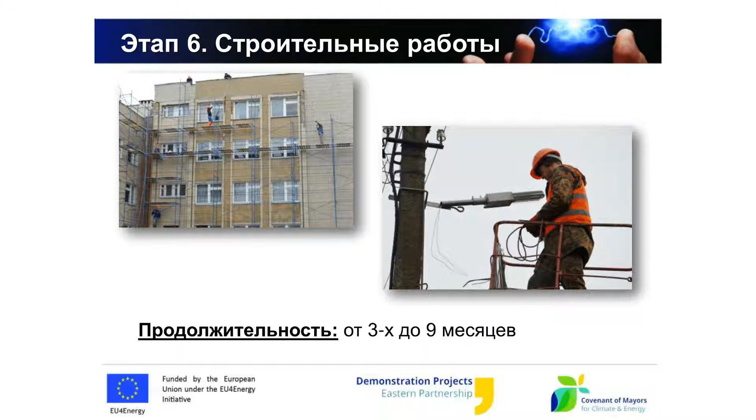Then we talk about acceptance of works, exploitation and maintenance, and verification of the project. So construction works, depending on the type of the project, can take from 3 to 9 months.

We talk about the different duration of construction, and definitely if you start your project somewhere in November, in winter, construction works are hardly possible. Therefore, your final stages will be prolonged for 3 months. So it's better to have everything done in due time and test your facility, your building in winter when energy efficiency indicators will be most visible.

What is construction or construction works? We talk about capital or current repairs of the building, restoration and renovation, and we talk about all the activities which are about construction works. Technical supervision is an inseparable part of the construction works, and from our point of view, technical supervision is a number of different measures like control over quality, volumes, cost, and documents of the object.

And the aim of the events is to make all the works from the beginning of the project till the end of the project manageable, transparent, predicted, and understandable for the client. And when we talk about technical supervision, we talk about a company or a person or a number of persons who will be the ears and eyes of the client directly at the construction field, and who will be able to demand quality results which will be satisfactory for you and for the European Union as the donor of the project.

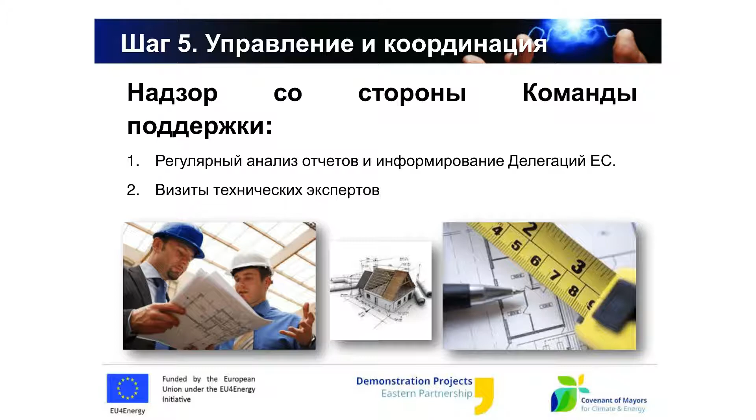Besides that, I've already shared the information about additional monitoring missions we perform. Our experts will have regular visits to your sites, and they will prepare reports about the quality of works and give recommendations to you, to project managers and project teams. And I hope that you, as project managers, will tell the construction companies about those deficiencies, and then within reasonable periods these construction companies will correct everything according to the recommendations.

If everything is done well, sooner or later, within 3 or within 9 months, you will come to the process of final acceptance, the handover, which is the process of confirmation of everything that has been done and that corresponds to design solutions and current legislation. And during the final acceptance, you study the site which was involved in the project. On the basis of this evaluation, you record in the protocol the deficiencies which have been traced and things which have been underdone by the construction companies. Also in the protocol, you record the period which you allocate for those deficiencies, and then on a repeated basis you accept this site as a ready one and you put it into operation, into commission.

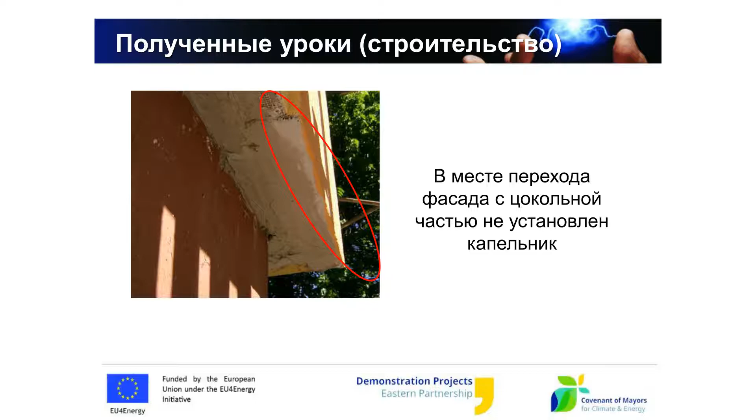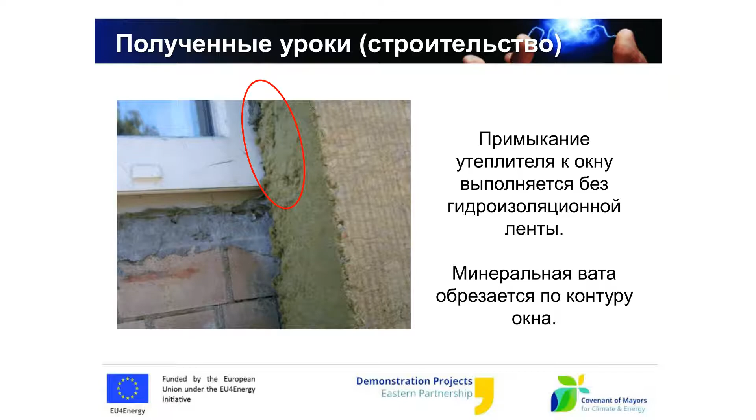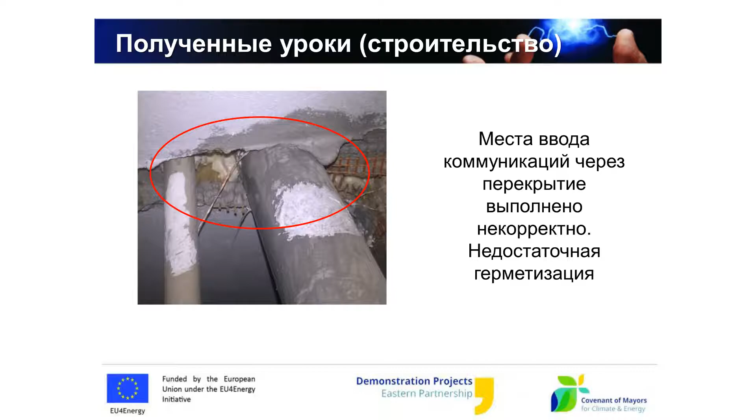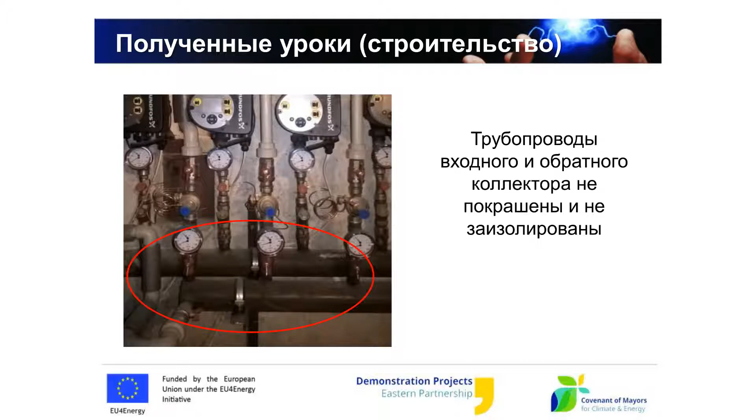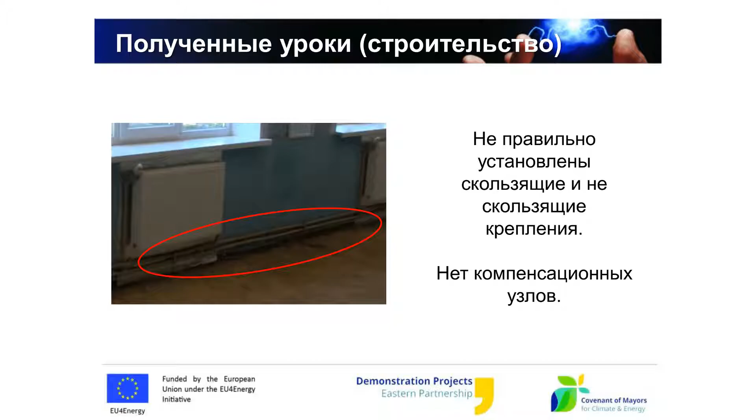In the projects which presuppose reconstruction of internal heat supply systems, all the pipes should be either pre-insulated or insulated with preliminary insulation. Here there is an example of bad reconstruction of internal heating system. Here we see that the binding was done in the wrong way, there are no compensation units, and even the pipe may crack, and all these works will be good for nothing later.

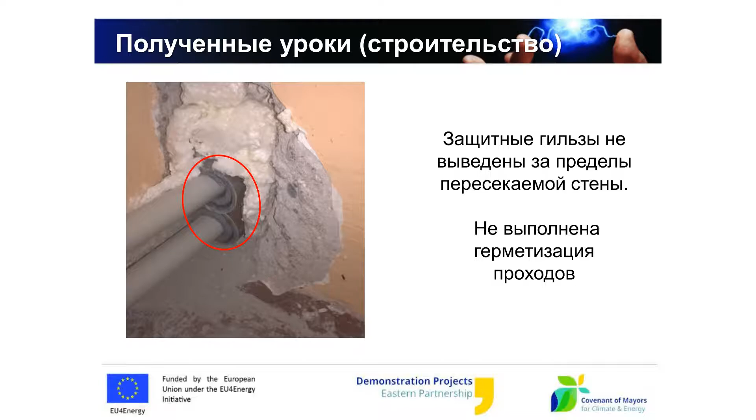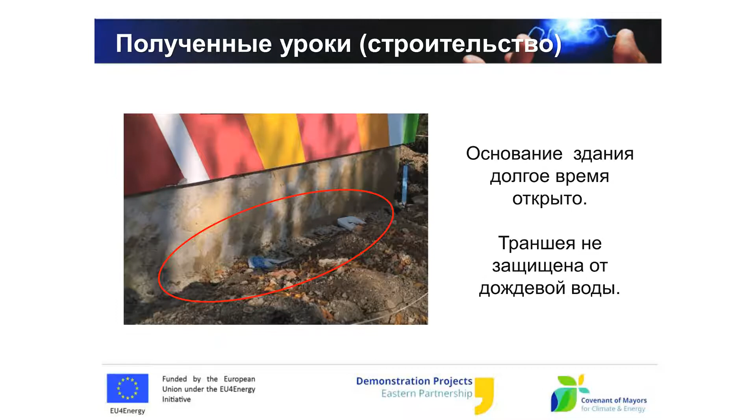Also, you should plan certain protecting measures from rainwater. For instance, if you leave the trench like that, which is not protected from rainfall, all the water will go under the building, and again, it can damage the ground floor, the mold may happen, etc. Here you see an example of bad storing of the materials. It is just open to elements, to the rainfall, etc. And in case of the rainfall, it will become damp and you won't be able to use it later.

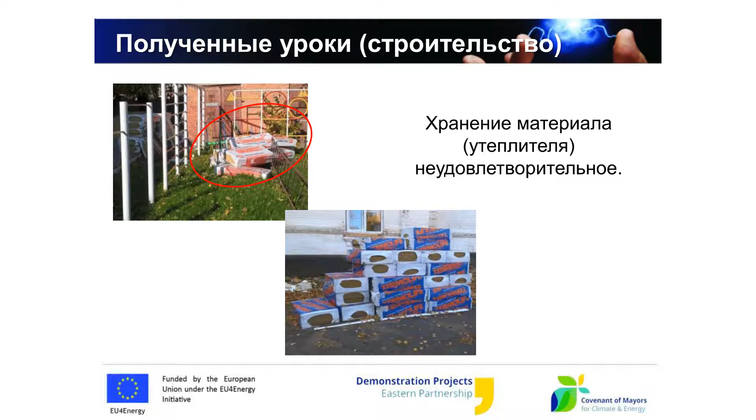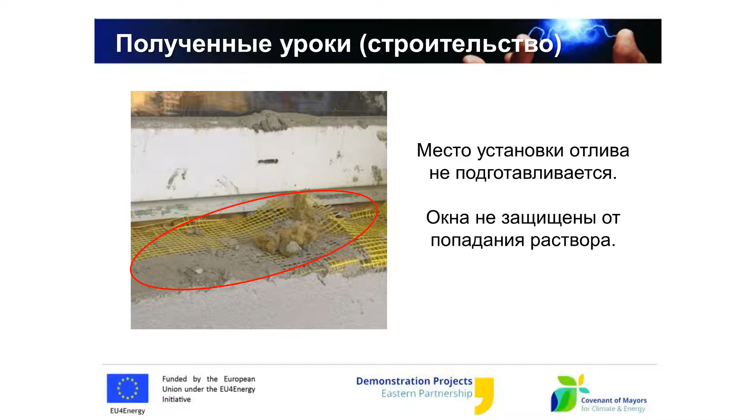Here you see an example of bad preparation for reveal site. We see that part of the insulator is not hermetized. Later it will be covered, so visually it will not be seen. But later, if water goes here, you won't be able to understand why the wall under the window is cold and why the mold appears.

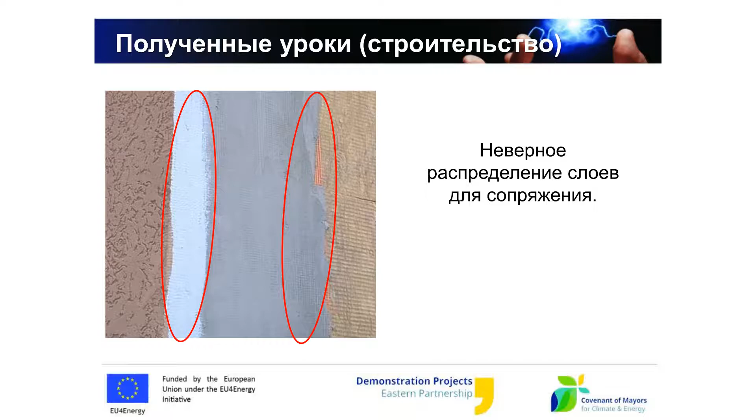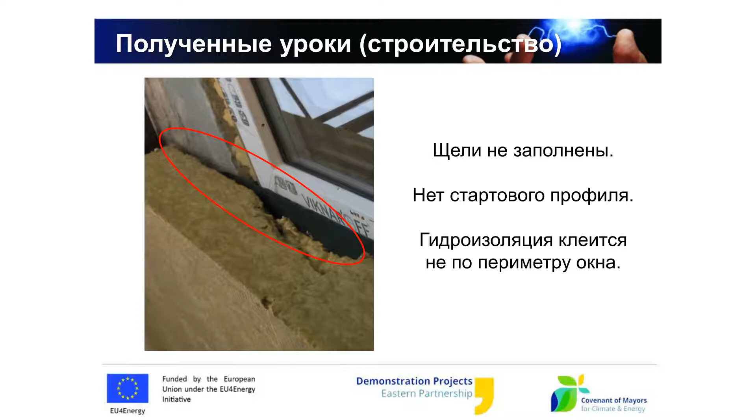Here we see the following picture. So they will continue, for instance, these cosmetic works, but here there should be at least 15 centimeters of the tape and of the film and of the other covering layers in order to ensure the unified picture. Here we have a number of mistakes, a big hole between the insulator and the wall, there is no starting profile, etc. Here we see an example of bad equipment for windows in case there is strong wind.

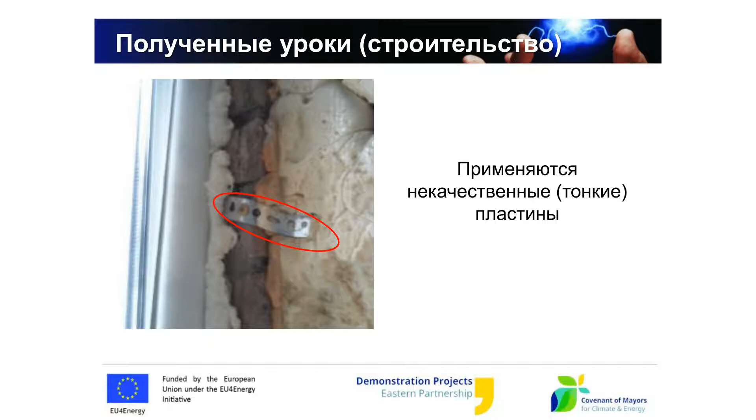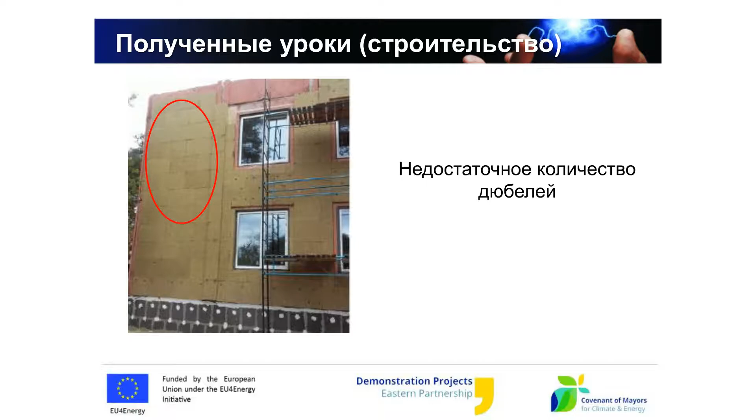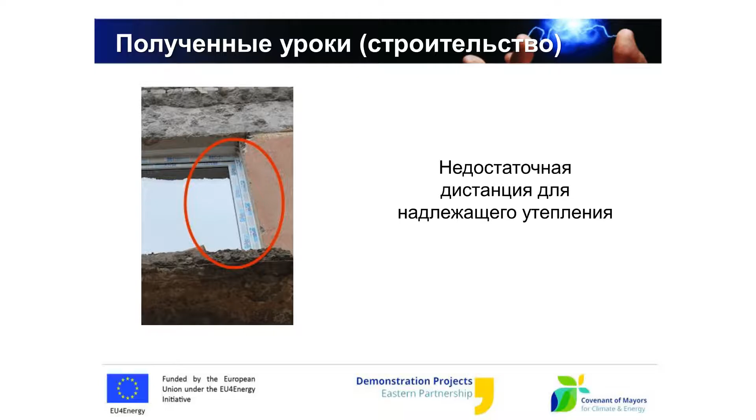Here we see an example of window replacement where the width of the frame will not be enough for good insulation, and this means influence of frost, mold, and the other negative consequences. By the way, these are all real examples from real projects which were implemented during the first stage of the project.

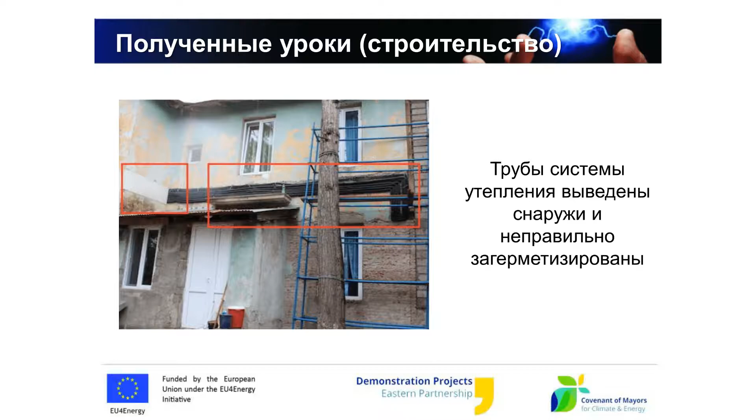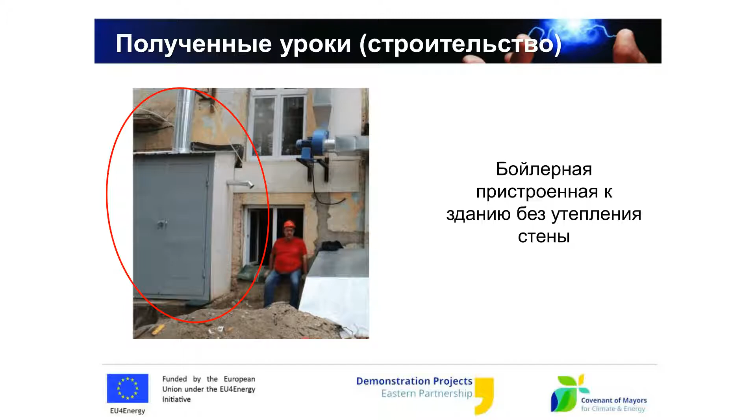Here you see an example of how the heating pipes are outside of the building and they are not covered with some layers but with gypsum plasterboard parts, which is very bad for the building. Here you see an example where the boiler house is part of the building and the external wall is not insulated. Here we see irregular assembling of the internal heating system. So aesthetically it is very bad.

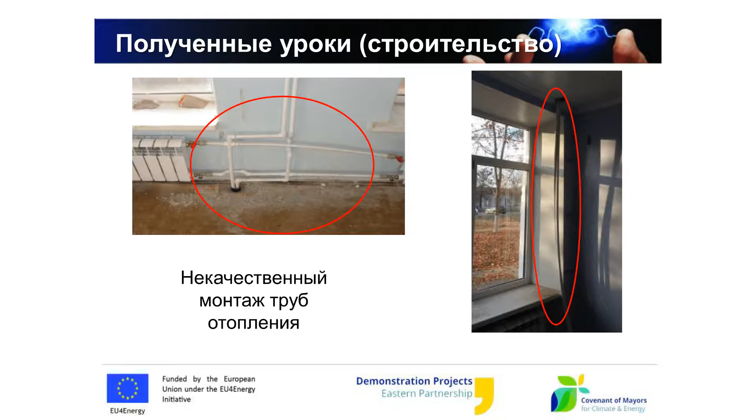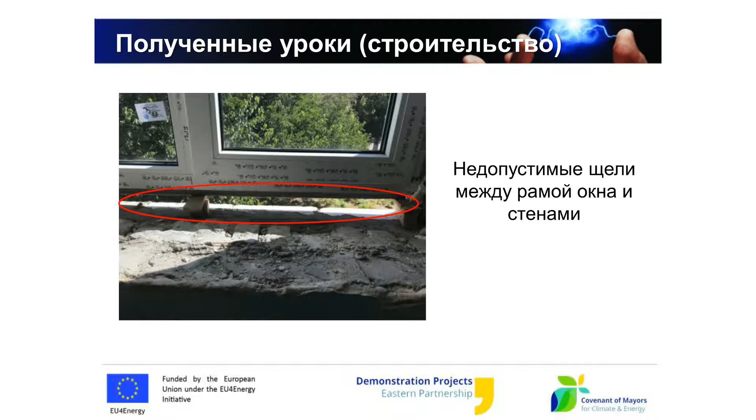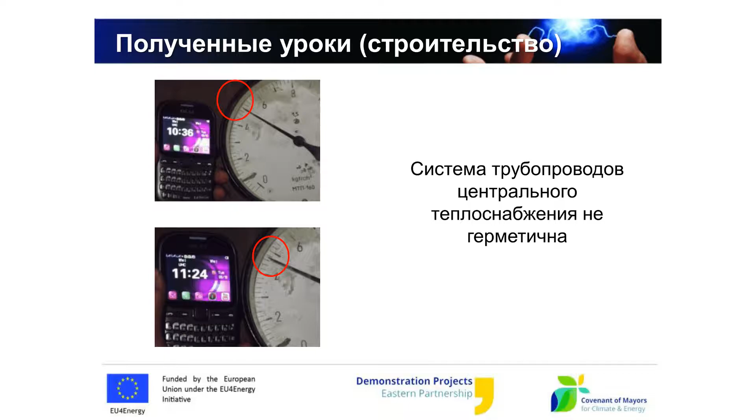Here we see an example of bad measurements of the window, and we see that the hole is too big, it is beyond all the norms. Here is a good example of the test of a heating system. We see the test with 50-minute difference, and it is a drop in one section. It means about 100 liters of loss of water just for 1 hour. You can understand what kind of losses they are going to endure during 1 year.

A couple of lessons learned regarding the maintenance or exploitation of the building. For instance, using pellets from agricultural waste, probably straw or something like that, or sunflower waste. It cannot be used because the boiler was supposed to use only wood. In case they use such pellets, the boiler will be damaged probably in a year or two.

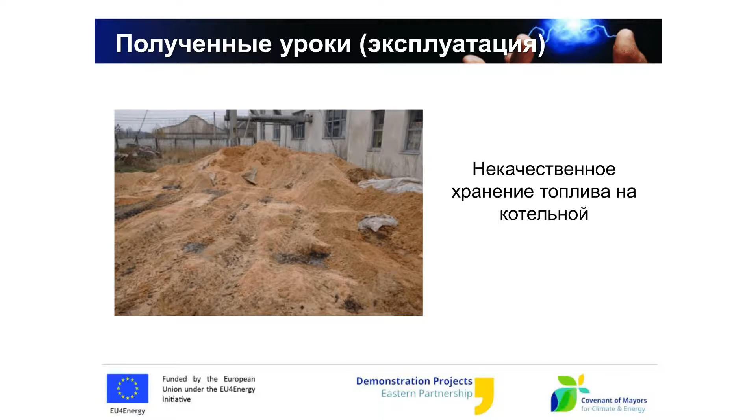Here we see an example of bad storage of the fuel. You see that first of all it is stored just on the ground, and then it is collected together with the ground, with the stones. So we talk about wood cuttings, or wood shreds. You see again that it is stored in the open air, under open sky. So again, under the influence of rain, it will not be in good condition.

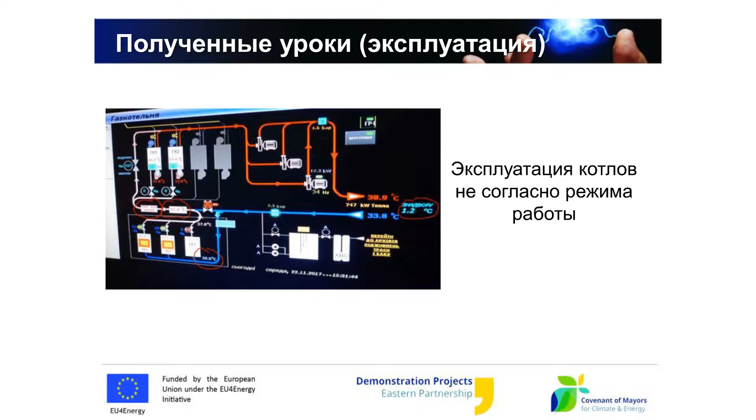This is a good example of the case when the boiler is used not according to the regime. There is a special temperature map, and when the external temperature is 1.2, the supply should be 52, 55, but the boiler house provides only 38 degrees. It means they want to save, or the quality of the fuel does not allow the boilers to work according to the planned regime. So as a result, we see that it doesn't work according to its passport. That's everything from me. Please, the mic.

I would like to talk about the last slide, this one. Here you probably cannot see properly, but the fuel was damp wood shredding, and all the attempts to have a good regime were good for nothing because the fuel was bad. So they all the time ordered the pellets. They wanted them to be dry. They were trying to mix the wood shredding and the pellets, but the maximum was up to about 40 degrees. But here only the boilers were replaced, while the infrastructure was done even before us.

Unfortunately, there were mistakes. And coming back to the planning stage, particularly planning of the boiler houses, we recommend doing everything in a complex, because fuel supply and fuel storage will directly influence the maintenance, the exploitation of the boiler. So in case you put damp wood shredding all the time, sometime later there will be serious problems with the boiler, and you understand the consequences.